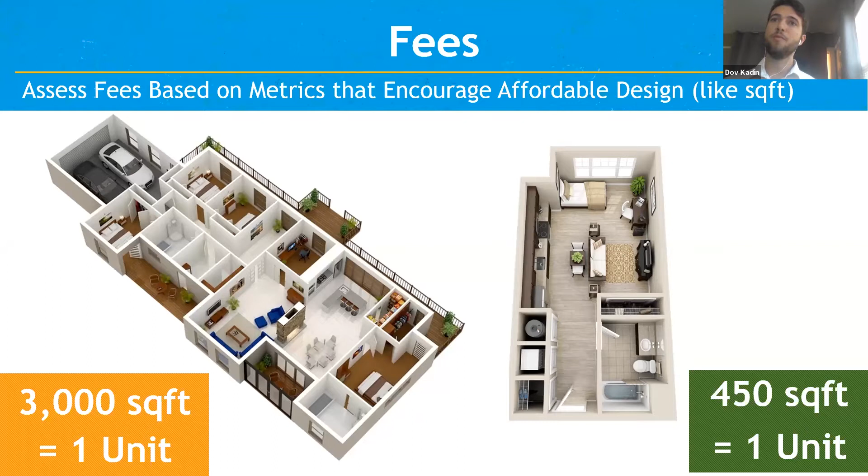The second category is fees. One of the biggest ways fee structures can discourage multifamily and more affordable housing types is charging fees by the number of units. Under this system, two very different units on the screen are charged the exact same fee, which incentivizes a developer to build as large a unit as the market will bear to get their money's worth. Structuring fees instead based on something like square footage can encourage denser projects with smaller unit sizes, which actually tend to have less impact and make more efficient use of the infrastructure.

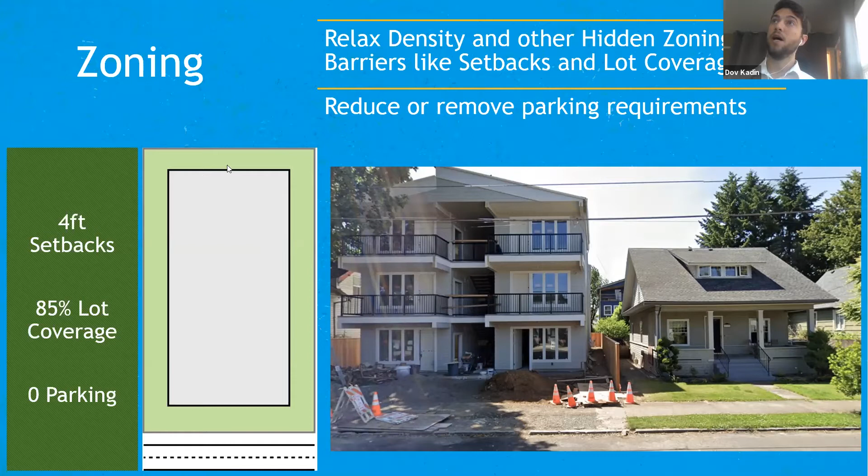As soon as you introduce some fairly common requirements, like a 50% lot coverage maximum, or 20-foot setback minimums on either side, or requiring 2 parking spaces per unit, that sixplex becomes physically impossible to build regardless of what density is actually allowed in the zone. And when you apply all three, you barely have room for a single family home. So sometimes it's these hidden barriers in our zoning codes that are actually driving both the density of the project that ultimately gets built, as well as the financial feasibility of building this type of housing.

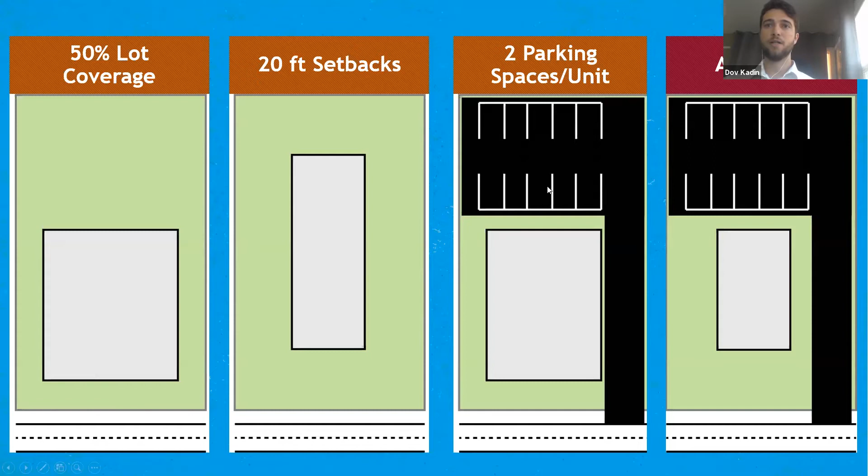And that, I think, is a good segue to turn it over to Alex. So I'll go ahead and stop sharing my screen, and Alex is going to dig a little bit deeper into these hidden barriers within our zoning codes.

Good morning, everyone. My name is Alex Steinberger. I'm a managing partner with Cascadia Partners. We're based up in Portland, Oregon, but we do quite a bit of work in your region. I actually grew up in Davis, so I know your region better than most folks up here in Oregon.

A bit about Cascadia Partners. We work all over the country in communities that range from large cities to small towns, looking at their codes and trying to find issues and also get them all the way through adoption of their codes.

We recognize that everything that's gone into a zoning code that may now not apply at one point made some sense, but over time, because of overlapping regulations and other considerations, these things have become stupid. So we like to say we get the stupid out of zoning, even if every standard had some rationale

that was based in good sound logic when it was adopted. And the reason we think we're uniquely qualified to do this is because we're both planners and developers. We have folks on our staff who have built missing middle housing, who've done public-private partnerships. So we understand from a developer's perspective how interactions with zoning and policy can hinder projects from getting built. And we also have a solid track record of getting projects implemented.

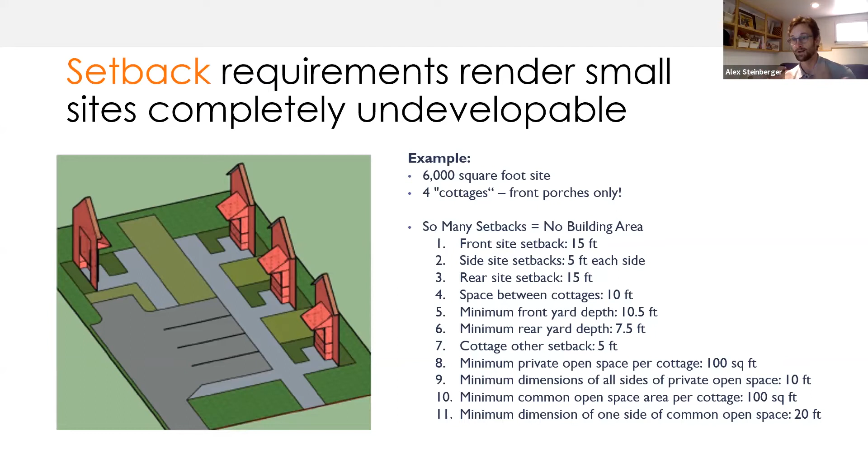This is an egregious example. A lot of times things aren't quite as obvious. This is actually an example from your region. Here we see relatively large front and rear setbacks and side setbacks—25 feet in the front, 5 on the side and 15 in the rear. In this zone, the maximum density is 14 units per acre. And the only way you hit that here with the constraints that the setbacks create is through relatively small units.

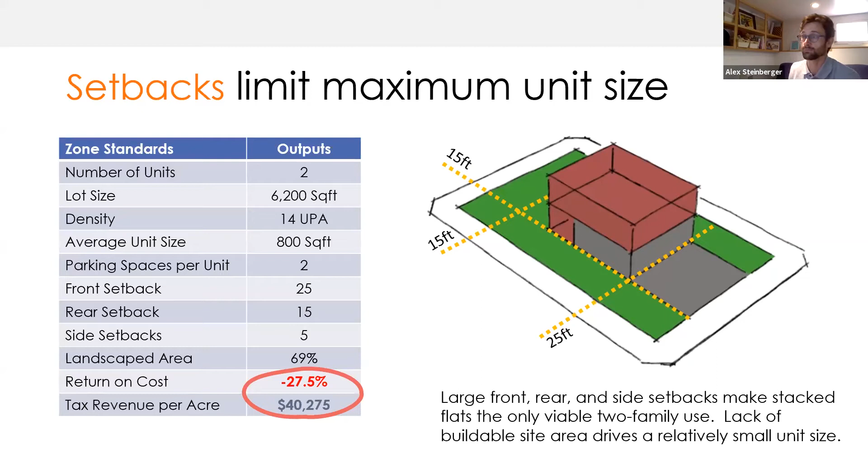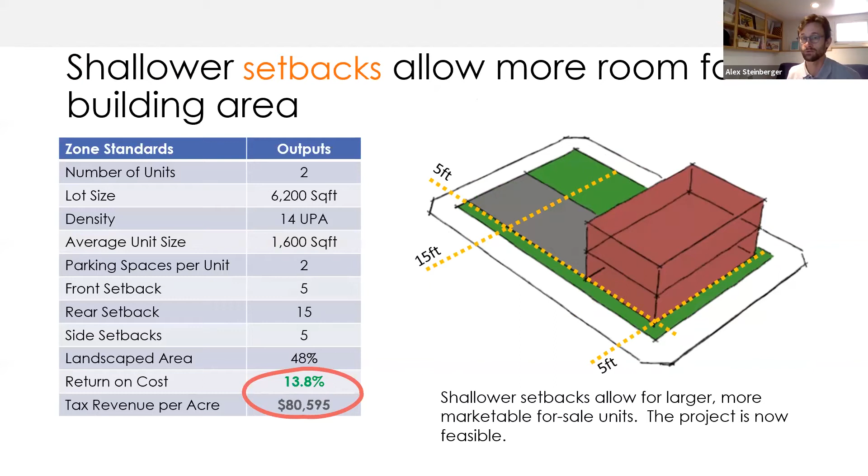Now that may work, but in most markets, that's going to be difficult to sell, especially if you're trying to do a for-sale duplex project. But if we reduce those setbacks to a more urban standard, like 5 feet in the front and 5 feet on the side, now we can create larger, more marketable duplex units that are actually feasible. So right here, just by changing that one standard in our code from large setbacks to smaller ones, we can change the feasibility equation in this zone.

So setback best practices: focus open space requirements on creating usable space, like shared courtyards, rather than just setback from the street. Consider upper floor step backs rather than setbacks where appropriate. If you are just stepping back on upper floors, that's a lot less loss of building volume.

Reduce front setbacks to encourage more pedestrian-friendly urban form, bring the buildings up to the street, and allow parking in the setback. And you'll hear me say this quite a bit today, but it's really key to perform these massing studies on your zones so you avoid the front porch scenario that the city of Milwaukee was experiencing. That's key, and it's amazing how many communities just don't do that.

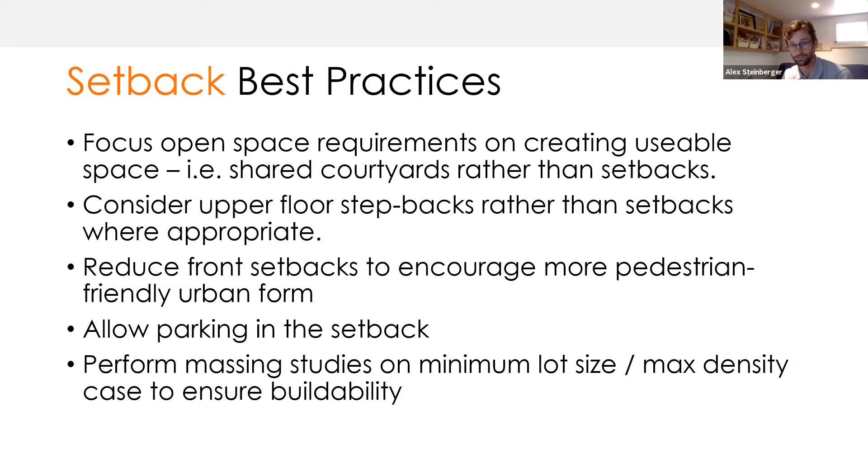So now to the second horseman of the zoning apocalypse: density. Density has a direct impact on urban form and affordability. And in almost every community we work, missing middle housing is pretty uniformly liked.

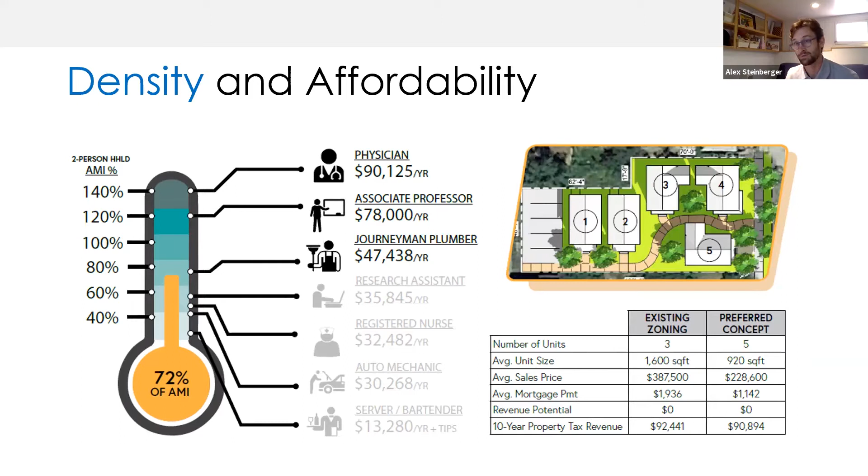But if we relax the minimum lot area required per unit and allow 5 units, you get smaller, much more affordable units that open up an ownership housing product to a broader range of incomes. So you can see we went from 108% of AMI required to afford these units to just 72% of AMI.

Another thing I want to highlight, and this is something we see in a lot of communities, is the mismatch between minimum lot area per unit and the typical lot sizes in a community. Every community has a typical lot pattern, and you can use GIS to figure out what that is.

In this instance, this is from Lander, Wyoming. We can see that the typical lot size based on the lots in a given zone is between 6,500 and 7,500 square feet.

So if you measure that against the minimum lot area required to build a house, you can see that if I'm trying to build a single family house, which requires 6,000 square feet, and I have one typical lot, I'm in pretty good shape. I have enough to build a single family house plus a little bit more.

But if I want to build a duplex, it starts to get tricky, because if I try to use one lot, I don't have enough space. But if I have 2 contiguous lots that I can assemble, now I'm wasting land. I can only build 2 units when I clearly have enough space to do more.

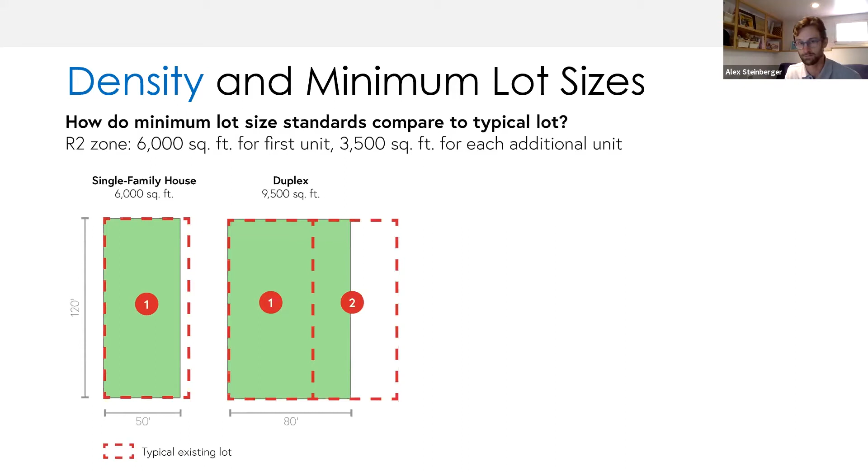Similarly, with a fourplex, I need 16,500 square feet, which is equivalent to 2 and some change typical lots. So it's really not a situation that makes it easy to assemble land efficiently and build more units.

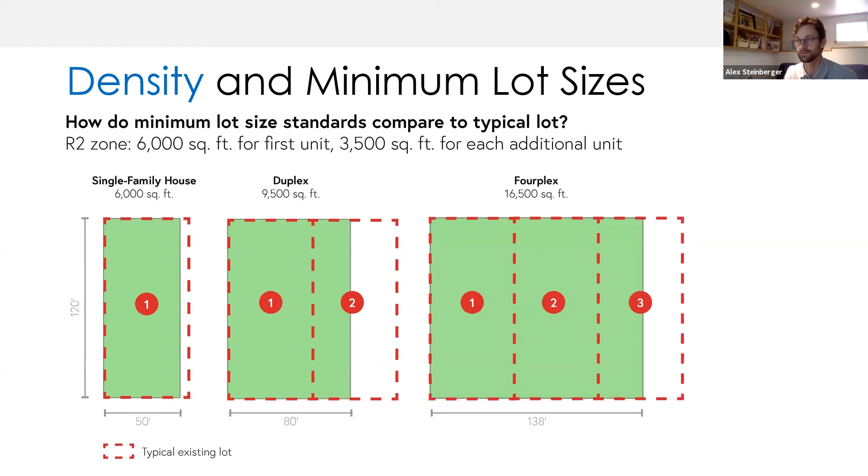And then there's the other issue of: do we even need this much land realistically to build a fourplex or a duplex? We looked at typical fourplex configurations for older missing middle housing from the 40s and 50s in this town in Wyoming, and found that if you take the same footprint they're on and plop that down onto the minimum lot size, it's way out of whack with how much land you realistically would want to build something like this.

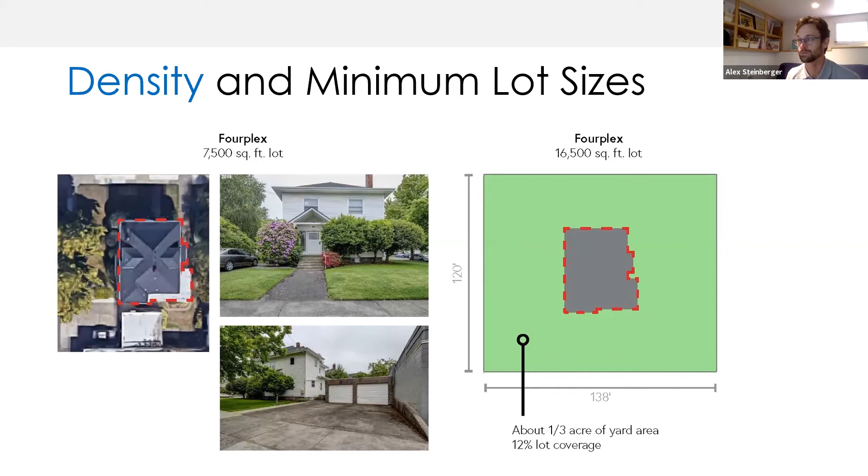In this example, taking an existing fourplex and putting it on the minimum lot size, you have about 1/3 of an acre of yard area and only 12% lot coverage. So it's a really inefficient way to use land, and it's not very encouraging for infill.

Because you can map all this stuff and pull the numbers in GIS, you can figure out exactly how much of your existing lots allow different types of unit development within a zone. So in this example, we found that almost 1/3 of lots are non-conforming based on their current standards. And in addition, less than 15% allow more than a single family home.

And of course, you can map that and figure out where in the city this issue is most present and try to adjust for that. This is key, and so many communities don't do this. But it's a really important way to ensure that the standards you're putting into your code reflect reality and don't create a division between intent and what can actually be built.

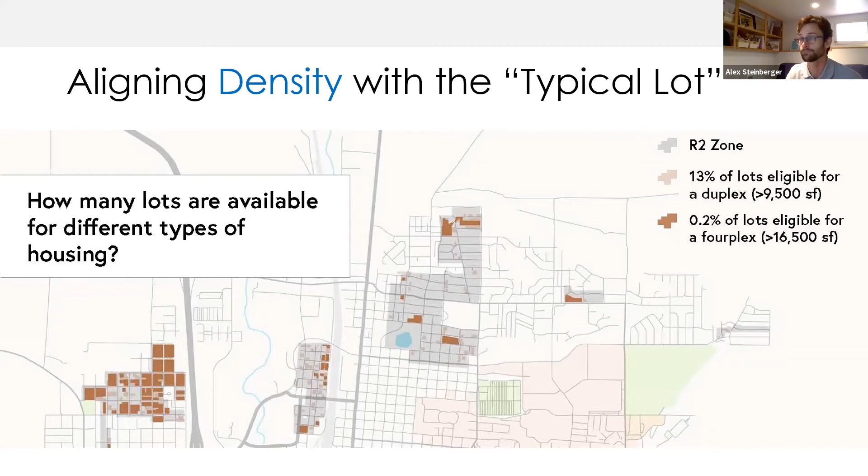So, density best practices: there's no single number, obviously, for density. It should be context sensitive. But like I said, performing a lot size analysis and trying to understand what the typical lot pattern is, and how that relates to lot area per unit or per building, is essential.

Also, this is a big one, and we're going to talk about it more in a second: consider the impact of parking. That is so important. Parking is probably the biggest hidden barrier in our codes that pulls us further away from the intent of a zone. Some communities we work in, the parking requirements haven't been updated in years, and some of them just defy logic.

Like this one from another small town in Western Colorado, which for some reason requires more parking if you have dancing at a bar or a restaurant. I'm not sure why that would induce more driving and need for parking, but there it is. And they require 20 spaces per 1,000 square feet. That's crazy. That is so much parking.

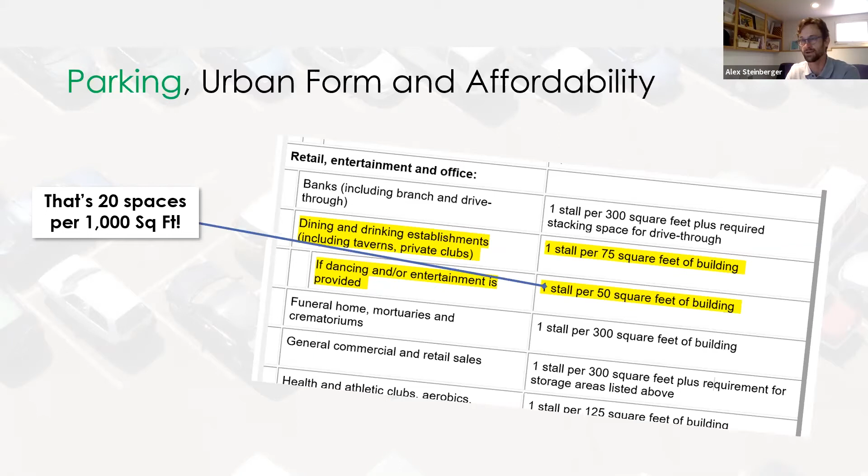This is an egregious example, but parking can often stand in the way of desired outcomes and also hurt feasibility. And what we find pretty consistently is that the types of development people seem to like the most are the ones with no parking.

This is newer retail development in Bend, Oregon, and also closer to your region here in Midtown. The reason people like this district is the funky mix of different uses. And these that we see here wouldn't be possible without zero parking at the time they were built.

There's a huge impact on urban form, and that's pretty obvious. This is an example from Portland when they were considering updating some of their residential and mixed-use zones. What they found, doing the same kind of analysis we often do, is that on a typical 10,000 square foot lot, if you require 0 spaces per residential unit, the most profitable thing for a developer to build is 32 condos. But if you require 1.5 spaces per unit, the most profitable thing to build is 10 much larger townhomes.

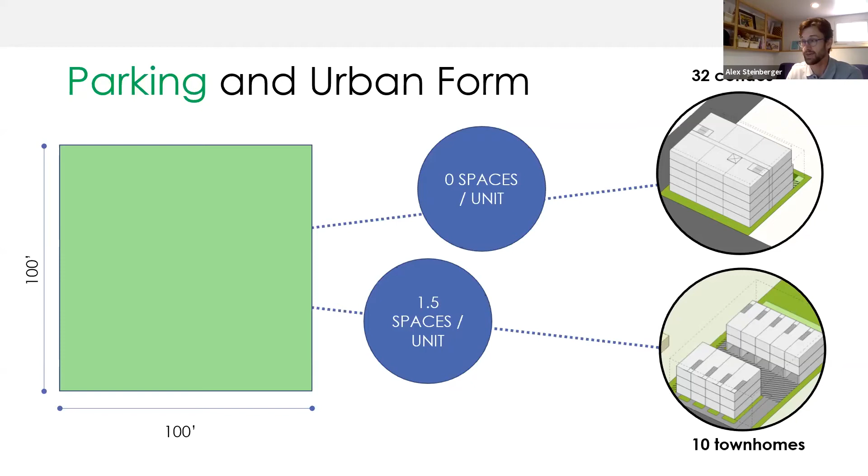So why is that? Well, with the condos, if you don't require any parking spaces, your parking cost is 0, and you can sell those off at a relatively low $280,000 per unit, which is well below area median income in Portland. But if you require 1.5 spaces per unit...

As we saw in Dov's example of the sixplex, there's nowhere to put that parking except underground. And if I have to put that parking underground, that's $2.1 million in extra cost added to this project, which adds about $70,000 to the purchase price of each unit, rendering the whole project infeasible because no one wants to pay that much for small condos.

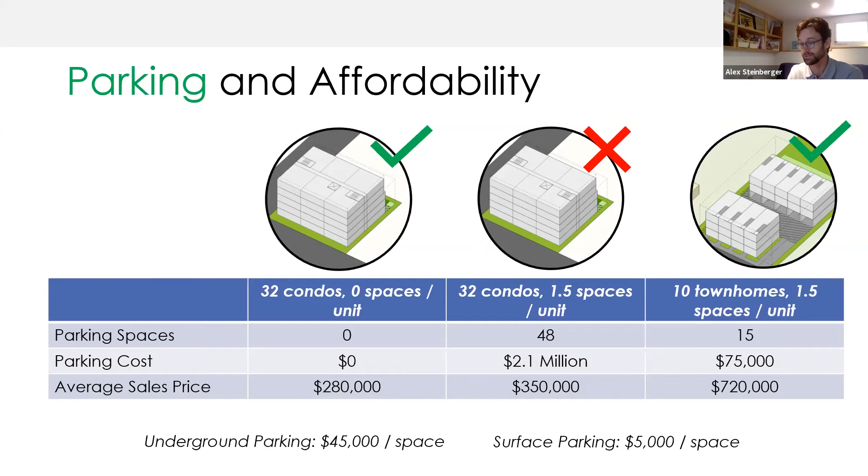Now, if we apply the same parking ratio to the townhomes, you end up with larger townhomes and a sales price that is actually achievable at $720,000 per unit, because these units are much larger. But as a result, less housing, and housing that's really not affordable to a broad spectrum of folks. So it's not really the outcome they intended. As a result of this analysis, they ended up going with a lower parking standard.

Here's another way to look at that. This is from an example in Bend, Oregon, where the median household income is $52,000. Oftentimes when parking standards are implemented, the vision is for an outcome like this, with this 4-story building where all of the parking is underground. But as many of us know, that rarely pencils.

You need really high rents to make that work. And so in this example, at $45,000 a space, our building is really only affordable to those making $82,000 a year, which is more than 50% above where we should be.

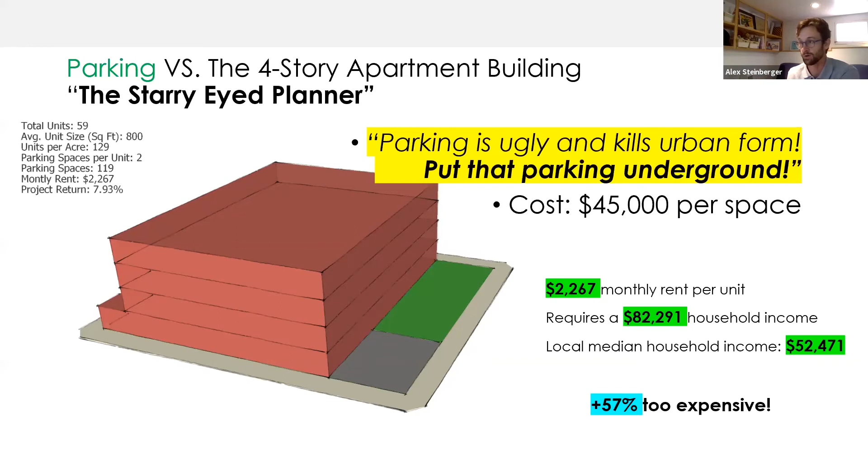Now, if I'm a cost-conscious developer, I'll probably try to accommodate the parking in a surface parking lot. It's much cheaper, but you end up with a building that's pretty suboptimal. Not a lot of people would choose to build something like this, and it still requires a household income that is higher than the median.

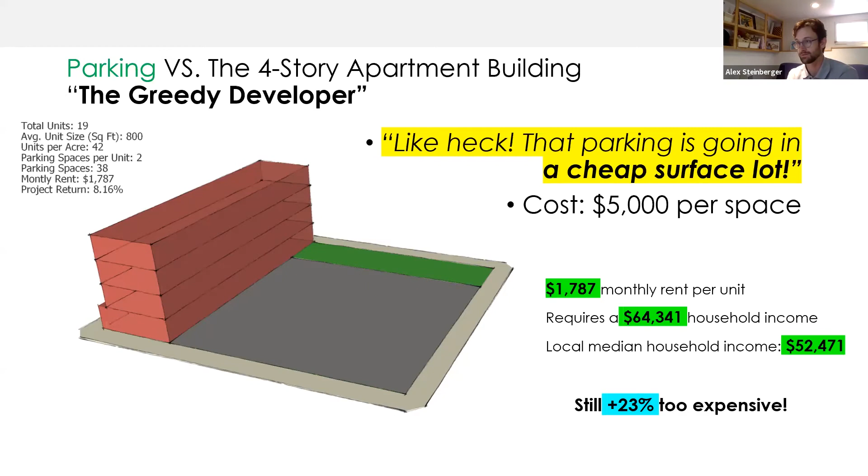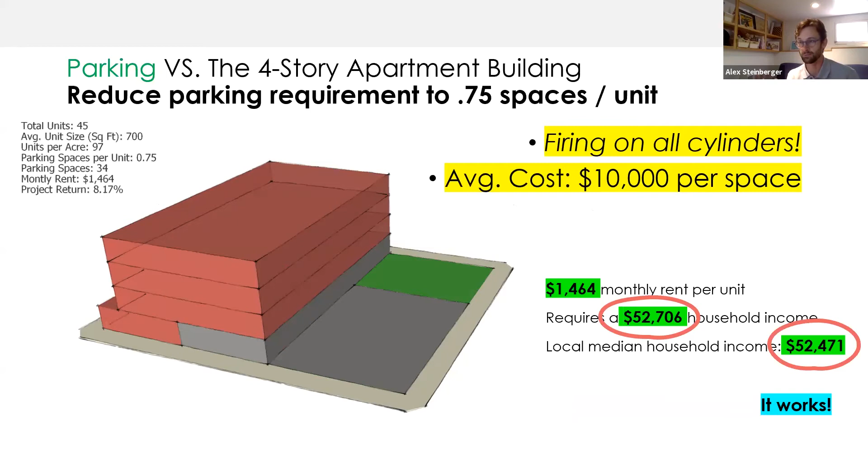But if we reduce the parking to 3/4 of a space per unit, we can accommodate it in a mix of surface and tuck-under parking and have a much more feasible result. Actually, we're able to rent these out at a level that's affordable to people making the median income. So this shows how parking interplays with both urban form and affordability.

So best practices for parking. Again, this is really context sensitive, but set parking minimums low. We like to let the market decide. And I always tell people that in Portland, we had 0 parking required on the books for almost 3 decades before anyone took advantage of it. So even if you set your parking to 0, developers can still choose whether or not they want to provide parking at that level. But at least it gives them more flexibility to meet demand and to potentially build that 4-story building.

If you have to set a parking requirement that's not zero, make sure that whatever your maximum density allowed in the zone can be built with the parking required without building underground parking. Because as many of you know, in most areas of your region, underground parking is not going to pencil out, so if that's the only way to accommodate parking, it's just going to keep projects from happening.

Another best practice that many cities in your region have already done is to waive parking requirements within a certain distance of high capacity transit, for instance within high quality transit areas. And finally, allow on-street parking to count against off-street requirements. It's a small thing, but it can be helpful if those on-street spaces can reduce your parking requirements.

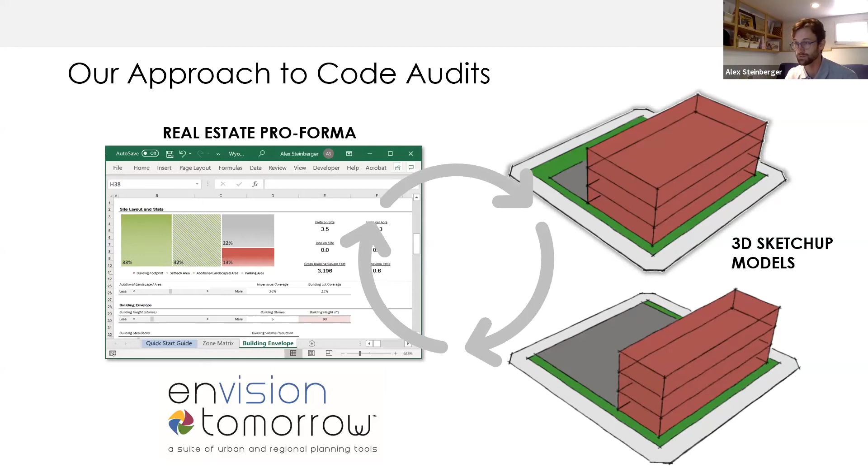I wanted to share a little bit of our approach to code audits and then take some questions from you all. One of the things we're hoping to leave you with is a pro forma based zoning audit tool and a step-by-step guide that will hopefully allow you to do this kind of work in your communities. We know with SB2 and all of these other efforts happening to increase housing production across California, this kind of work is critical. So to the extent these tools can be useful to you, we want to make them available.

So I want to do a little demo here of our pro forma tool so you get a sense of how it works. Hopefully y'all can see this. This is our pro forma tool, and it's an Excel spreadsheet based tool, so you don't need any fancy software to use it, just Excel.

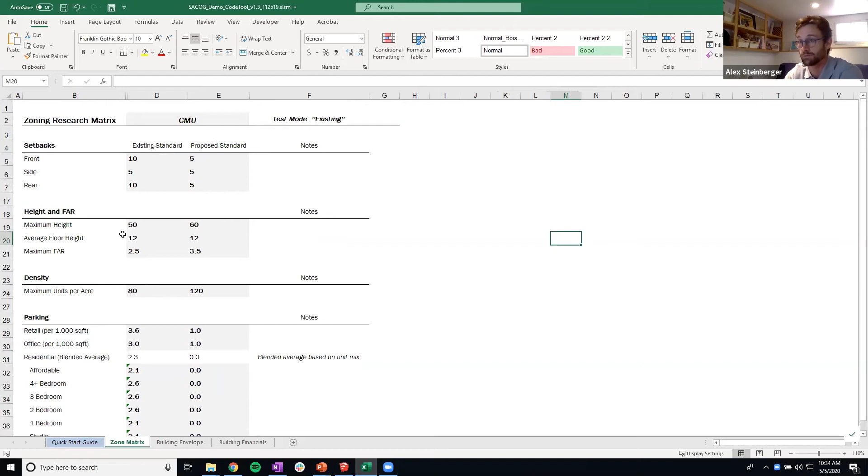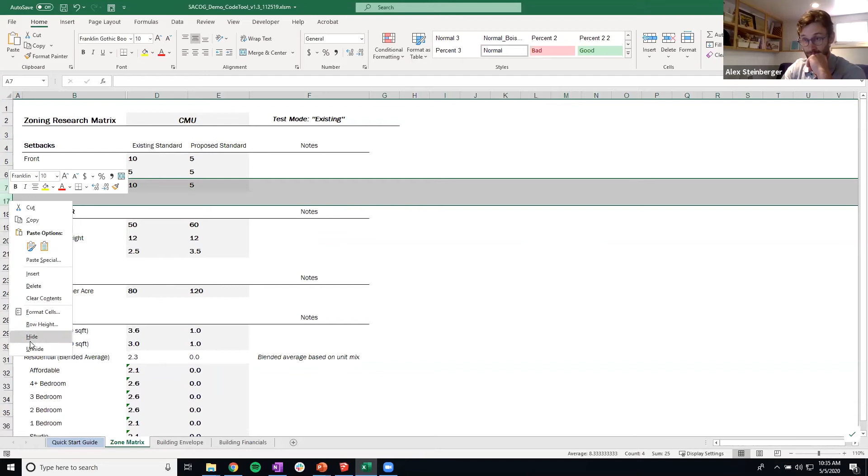The way we set it up is to actually have you plug in your existing code standards and then create a building within them. So we ask for information like setbacks, maximum height, maximum FAR, and units per acre. These are typical zone standards. We have others that we use for some other projects, such as lot dimensions and lot coverage requirements. These are pretty typical as well.

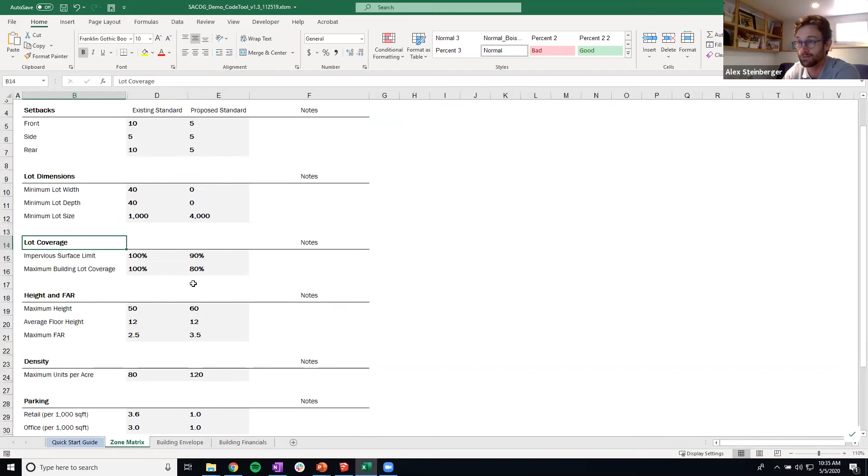And in addition to modeling an existing standard, you can also choose to tweak that standard by changing some of these requirements and measuring those instead. You'll see what that's like in a minute.

So this is what the pro forma tool looks like. I apologize if it's a bit small, but up here we have a readout of site area.

You can see the red is our building footprint and the green is our landscaping and setback area.

The pro forma takes real estate pro formas in a bit of a different direction, in that it's geared towards a planner and the way a planner thinks. So instead of plugging in the number of units or parking spaces, it tells you the number of units that would be contained within your building, the density of jobs and housing units, and also, very importantly, the rate of return on your building.

So in this instance, I've created a building that looks more or less like this. This is SketchUp, which many of you may be familiar with - it's a 3D modeling tool. And this building we're seeing here was actually created automatically by a linkage between the spreadsheet and the SketchUp program.

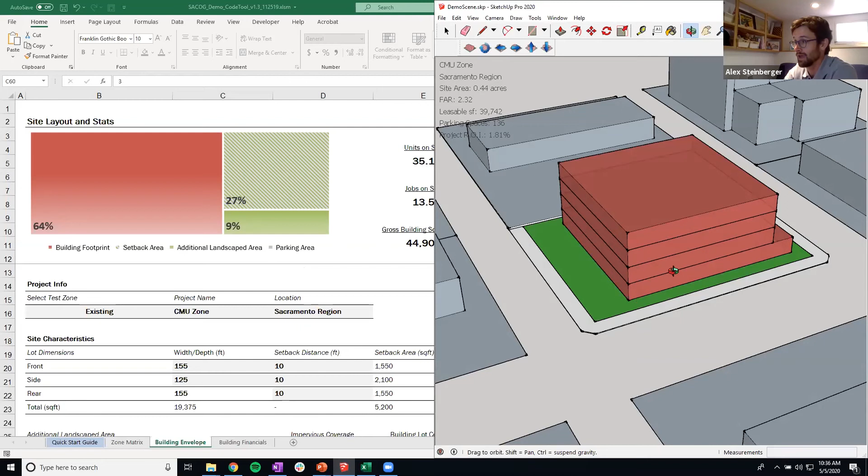So you can see if I were to increase my building height from 4 stories to, let's say, 8 stories, it will build me my building. But it also looks at setbacks, landscaping, and balances the area needed for both a building and its associated parking.

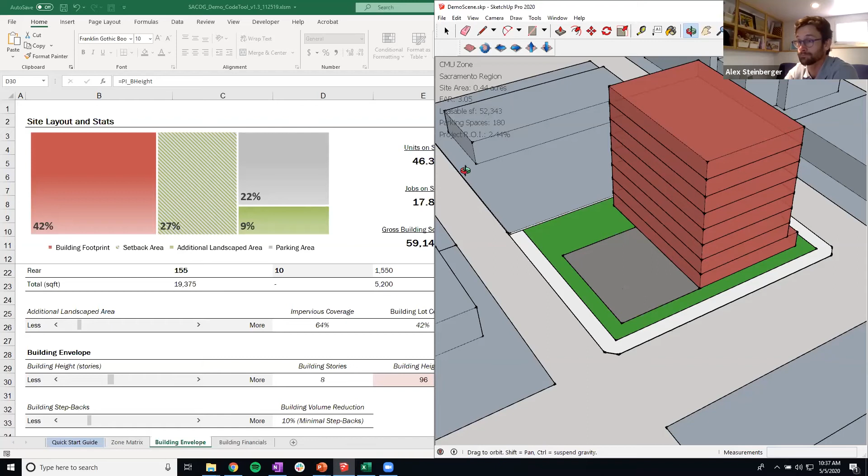So back to the pro forma. In this example, we have a 4-story building. We have 35 units on our site, and the site's about a half acre. So we're coming in at about 79 units per acre.

Now, this is a zone that actually exists in your region - I won't say exactly where - but it allows 80 units per acre. It allows 2.5 maximum FAR, and it allows both residential and commercial.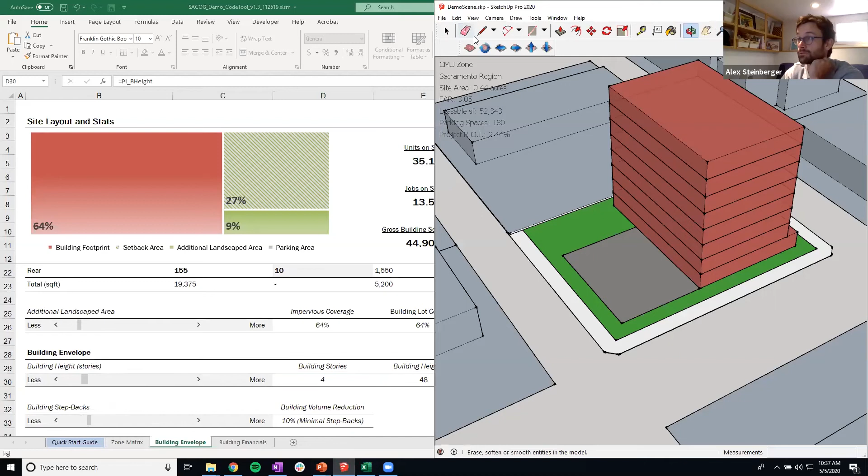And so right now, the building, if we go back to our model, just refresh this, it looks pretty okay. It's taking up most of the lot. There's not a big surface parking lot. It's a nice urban building. It's hitting our maximum density required, which is great. And it includes both commercial and residential.

So it's basically the planner's dream, right? We have relatively dense mixed-use development. This would be great in a high quality transit area.

However, there's one major issue with this building, and that is its financial performance. Right now, the cash on cash return is negative, and the internal rate of return is less than 2%. We really want this to be around 10%. So why might that be the case?

Well, in this zone, the requirement for parking for residential units is around 2.5 spaces per unit, and the requirement for retail is 3.6 spaces per 1,000 square feet of retail. If you remember from this image, there's no parking visible, right? But that's because we've accommodated it in 3 levels of underground parking. That's a lot of parking, and recall that the cost per space is about $45,000 per space. So by having to provide all that parking and putting it underground, we've torpedoed the feasibility of this project.

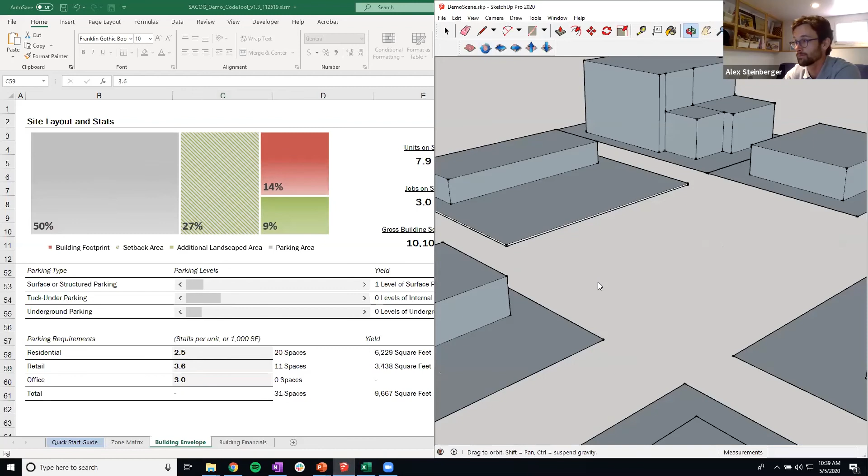So what happens if I get rid of that underground parking? Well, I can move this slider, and you can see my return is now up at 8%, which is great. But now all the parking that I have for my building is on the surface. So if we go back to our model, we can see, wow, that's not a very inspiring building.

It's kind of a little tower. It looks kind of funky. I doubt anyone would want to build this, let alone live in it. And it doesn't really contribute a lot to the urban environment here. So we've improved our return, but the outcome isn't really feasible from a building perspective.

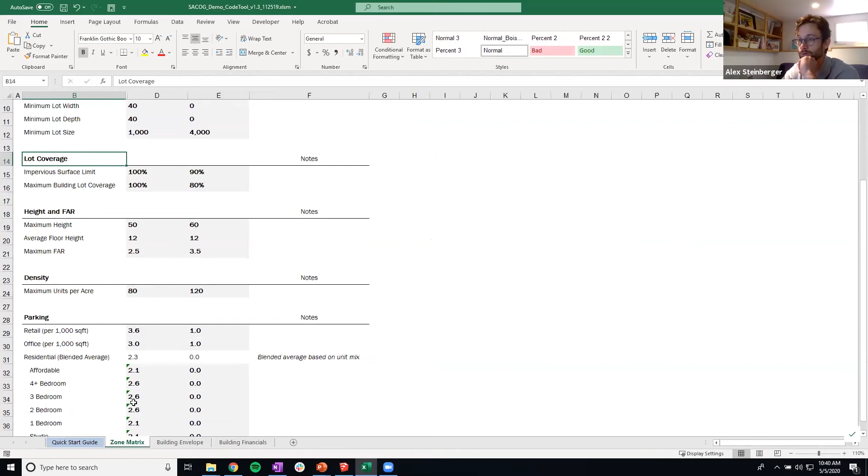So what if we reduce our required parking? Let's try half a space per unit and 1 space per 1,000 square feet of retail. You can see these cells have turned red, and that's because when we plugged in our standards, we told it how much parking we needed, and it's telling us, hey, you're not providing enough parking per your standard. So it gives you that feedback.

But nonetheless, we can plug that in, and now our return is pretty good, and our building is looking a bit better. It's using up about half the site. Maybe we can do a bit more, so we can try adding a little bit of tuck under parking, about half the level of that. Now we're at 10% return.

Wow, right on the money. It's like I planned this or something. 10% return, 55 units an acre. And if we go back to our model, looks pretty good.

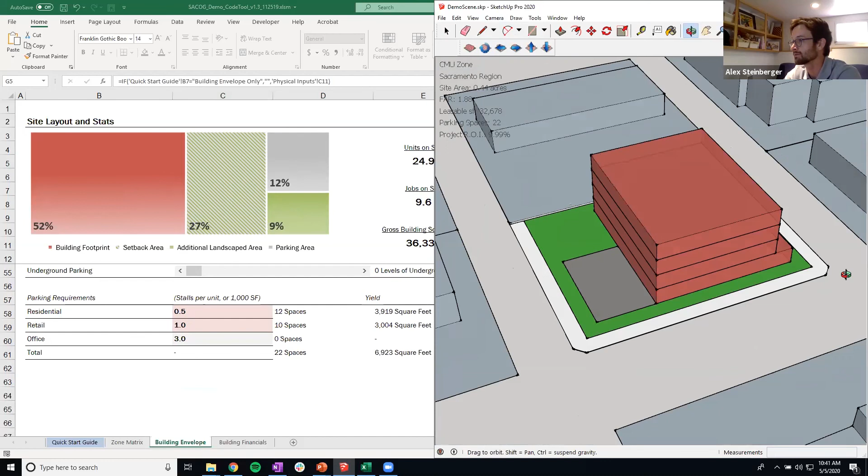It has a little bit of surface parking, a little bit of tuck under, takes advantage of the lot, provides a nice urban building, and it pencils. So parking really was the key here.

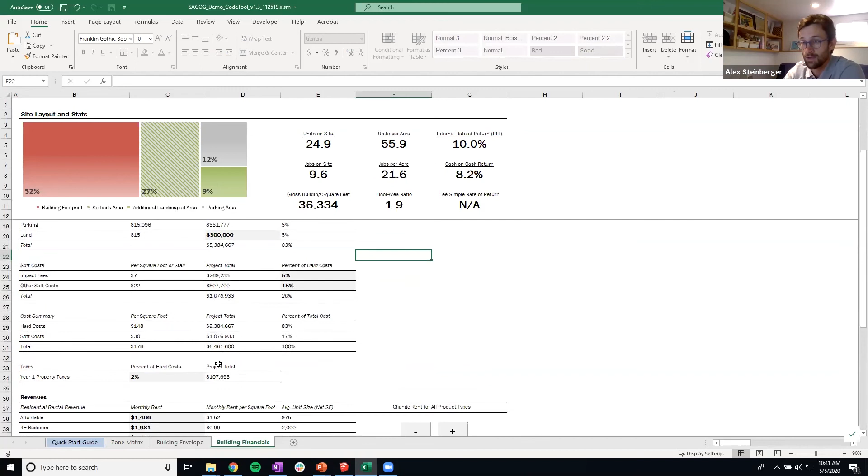And if we wanted to test alternative standards, we could go back to the zone matrix and plug in different numbers here and test if we break the code. We also have control over the financial attributes of the building—construction costs, land costs, things like impact fees and taxes, we can test those. And then we can also test different rents and see how low we could get this rent to go while still keeping the building financially feasible.

You can also program in affordable or below-market units as well. So there's a lot more you can do. We barely scratched the surface with this, but hopefully it's interesting and something you'd like to use more. We have a PowerPoint presentation we'll provide to everyone that includes a step-by-step guide, basically walking you through what I just did.

Before we go to questions, I wanted to highlight one additional attribute of what we're able to do with these types of tools—scaling up the type of analysis we just did to measure broader policy impacts of changes to zoning. For instance, if I reduce parking in a zone, I make certain building types more feasible, and I actually change where they can be built. I'm changing that equation for a developer.

A lot of times what we'll do is called a residual land value analysis using these tools. Residual land value is this concept in real estate economics that tries to back into the maximum amount a developer could afford to pay for a piece of land. So if I'm increasing the residual land value of a building, I'm changing the number of places where it can be built and potentially increasing the capacity of my zoning.

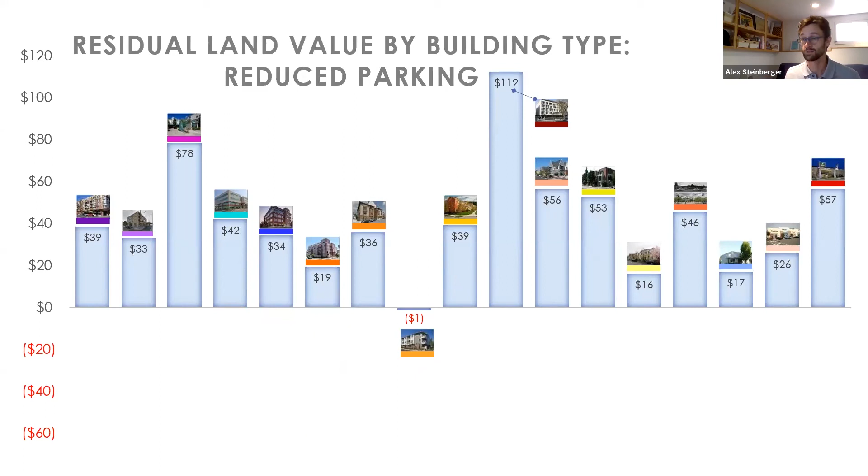And using a tool called Envision Tomorrow, which is actually used in your region by SACOG and others, you can map out where these properties might exist. So if I wanted to know under current code what parcels are likely to redevelop and how many units would redevelop, I can do that.

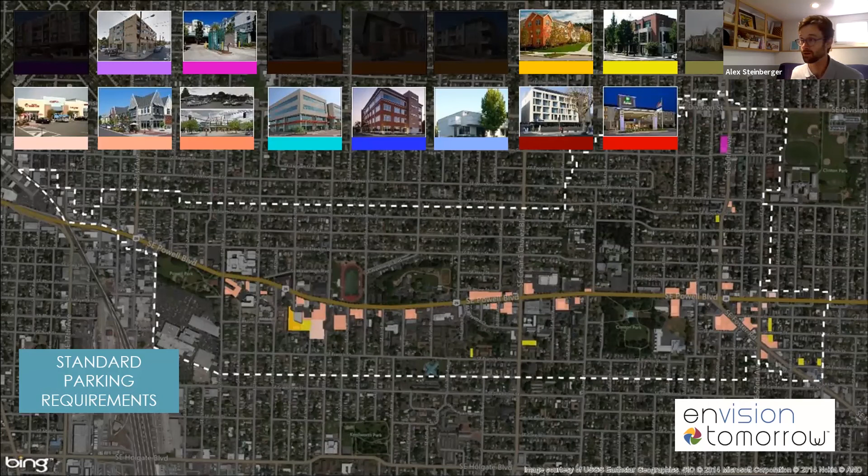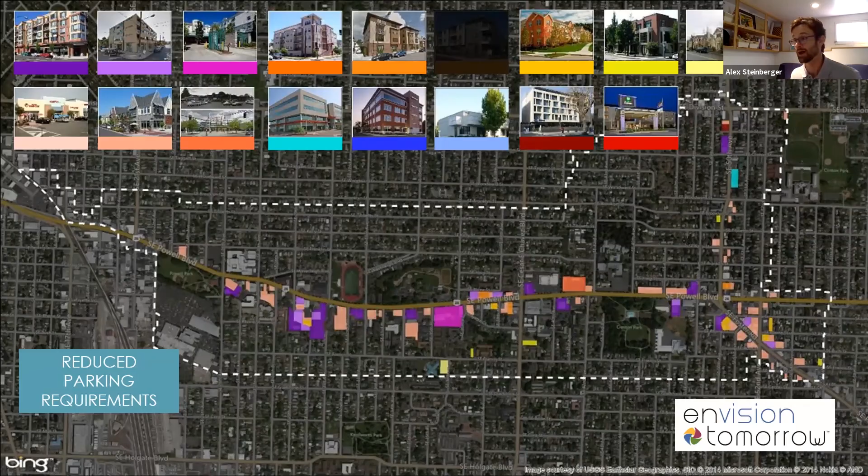But you can also test an alternative: if you reduced your parking ratios, how many more parcels does that open up? How many different newer building types does that allow? And what's the impact to your zoned capacity? There's a lot more that this tool can measure, such as housing costs and tax revenue potential.

There's a resource online, envisiontomorrow.org, where you can learn more about how this tool is used. And you also have a great resource there in your region with SACOG.

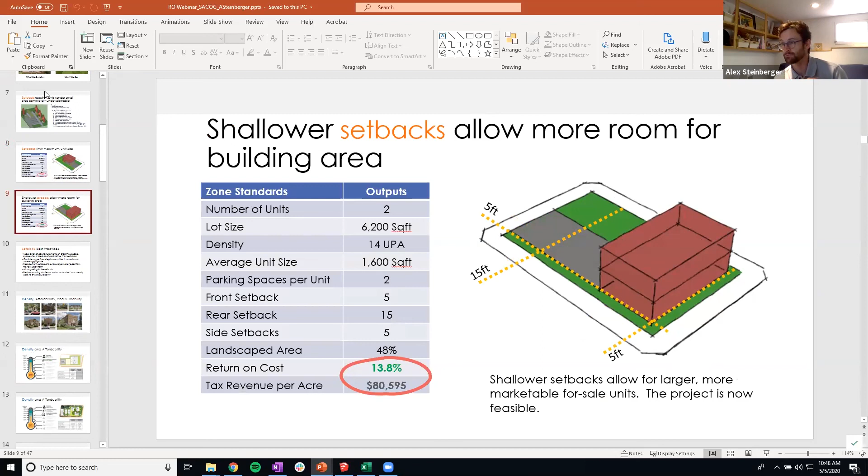Yeah, so unit size is the primary driver here. What the setbacks in this example do is limit you to just a very small portion of your lot being developable, which in some cases may work, but if you have a 6,200 square foot lot and all you can build is 2 800 square foot attached or stacked townhomes, it's not particularly profitable for a developer. But if you relax the setbacks, you could potentially build larger, more profitable units. In this analysis, we went further beyond setbacks to also increase the number of units you could build within this zone, because where it really starts to kick off is if you can do a 4-plex. If you can do a 4-plex, you can do smaller, more affordable units and still have the project pencil.

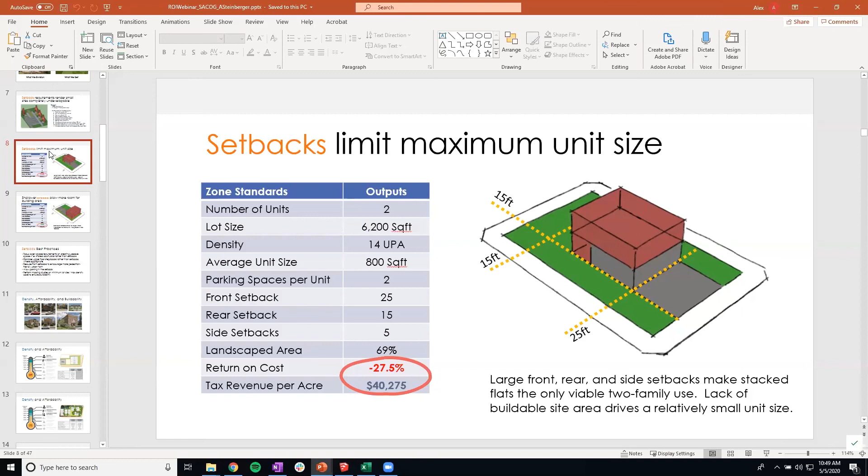Can you say a few words about FAR versus height limits? I assume that question is about which one's a better practice for regulating density, and the person who asked can correct me if I have that wrong. But I think in a lot of communities it becomes problematic when you have multiple governors of density. If it's FAR versus height, I don't have a particularly strong inclination one way or the other. But when you have FAR and units per acre, things can get problematic when those don't quite agree. So I'd recommend just having an FAR standard and not a density cap, which allows more flexibility for smaller units potentially, or for other uses.

Height is very difficult to gauge in terms of outcome by itself. You could have some pretty undesirable outcomes from that. FAR probably gives you a bit more nuance. And it's pretty rare in many communities that height limits are actually attainable given the density standards or parking requirements.